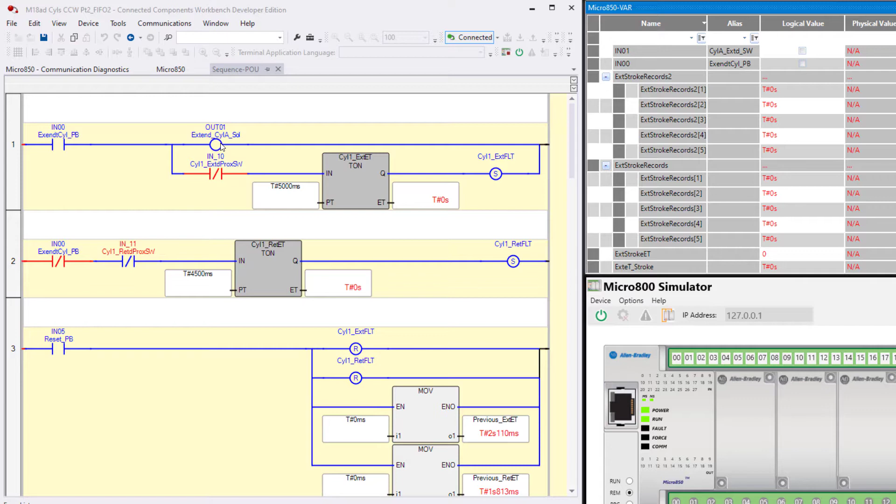Okay, we've pretty much worn out this particular lab project as is in the manual. But just to quickly go through what we have so far, if we push the extend cylinder push button, we energize a solenoid, and then we have logic that simulates the cylinder extending down here, this rung of logic. These two moves right here are moving 0 into these variables to clear them.

So if we click on input 5, you can see that rung goes true. It resets any faults and anything else we've got connected to input 5. Now remember that a little piece of code like this, if it were in an actual application, would have other hooks, other connections to other parts of the process. We don't have that here, so that's why we use inputs like IN05, reset push button, to do things that other parts of a real process would do to clear it to make ready for the next instance or incident.

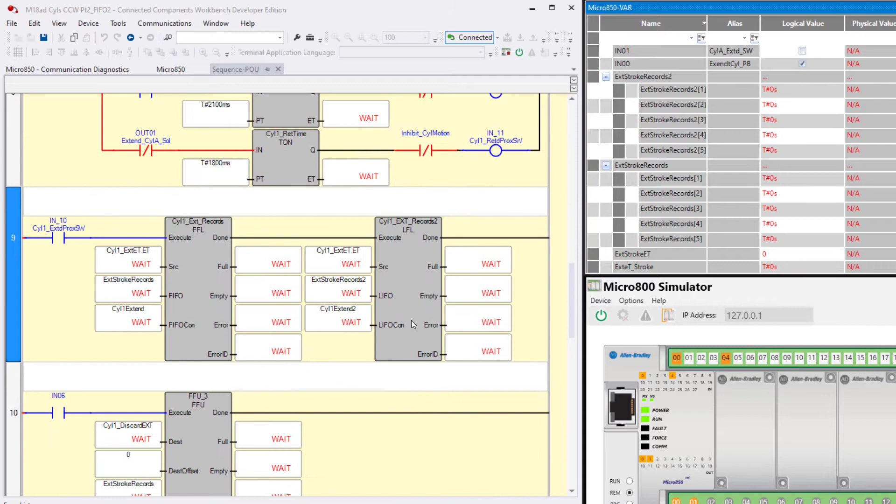And we also had our fault logic, and here if we have an extend or retract fault, we turn on output 0. We also created this rung of logic to simulate a sticky cylinder. In other words, if I turn on input 4, it's in neither position, not extended and not retracted. So if I turn on input 0 to make it extend, you see this is true while it's extending. And because I'm using this to inhibit cylinder motion, down here I'm going to make it time out and fault. Well, we don't want it to fault, so we'll turn off 4, turn off 0, let it retract.

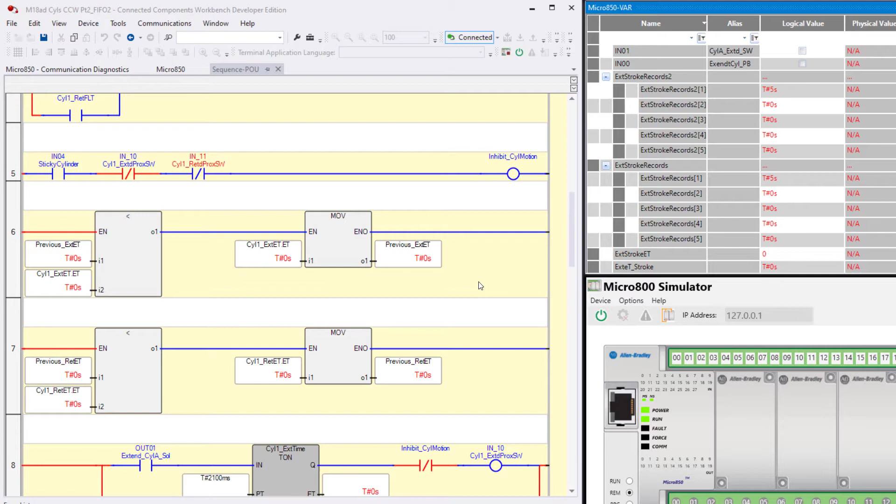Then we'll go back up here to where we have cylinder fault. See, we have an extend fault. And I'll turn on 5, and that resets it. And all we're doing here is demonstrating that if the current extend or retract value is greater, less is not a bad thing, but greater is. So if it's greater, then we want to move that into this variable. That way this variable always represents the longest interval for extend or retract.

Now let's jump down to the new stuff. In other words, this is the extras that I threw into this discussion. I'm using a FIFO and a LIFO. A FIFO, F-I-F-O, first in, first out. A LIFO is last in, first out.

If you wanted to compare these to an ammunition magazine, like for a pistol or a rifle, the first in, first out would not be possible with an ammunition magazine because the last one that you shove into the clip or the magazine is going to be the first one out. So the LIFO over here would behave like an ammunition magazine or clip.

So we have a FIFO and a LIFO, and they are both file instructions that work with files. Now in this case, we're going to keep it short. We're going to use a length of 5 for our file.

And the reason that we're doing that is because I'm not patient enough to sit here and operate this virtual cylinder 10 times or 100 times to get the stack full. And over here we have 2 stacks, extend stroke records 2 and extend stroke records.

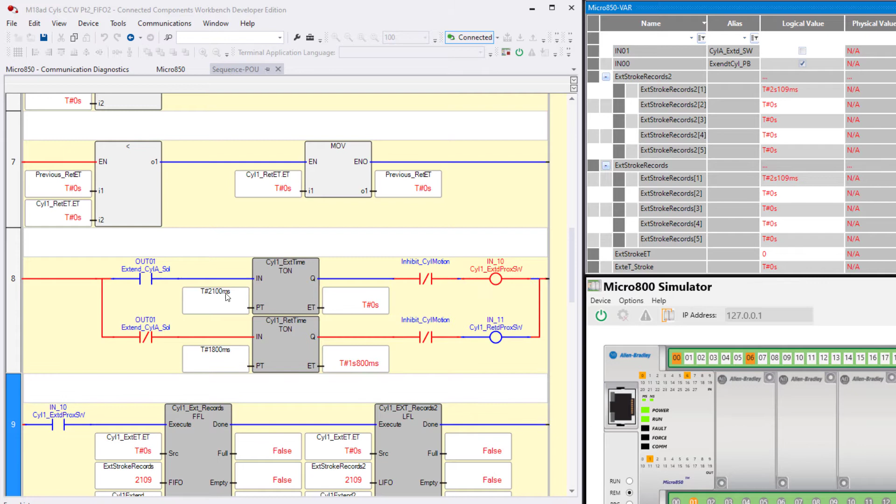To do that, we're going to turn on input 0 and I'm going to let the simulation time out, and you see that we have something like 2.1 seconds. Now if we go back up here, you'll see that I have 2100 milliseconds for my simulation of extension, and I have 1800 milliseconds to simulate the retraction. The simulation results in this virtual sensor, extended prox switch, retracted prox switch, going on and off based on some simulated interval for extending and retracting. And that's what we're recording here.

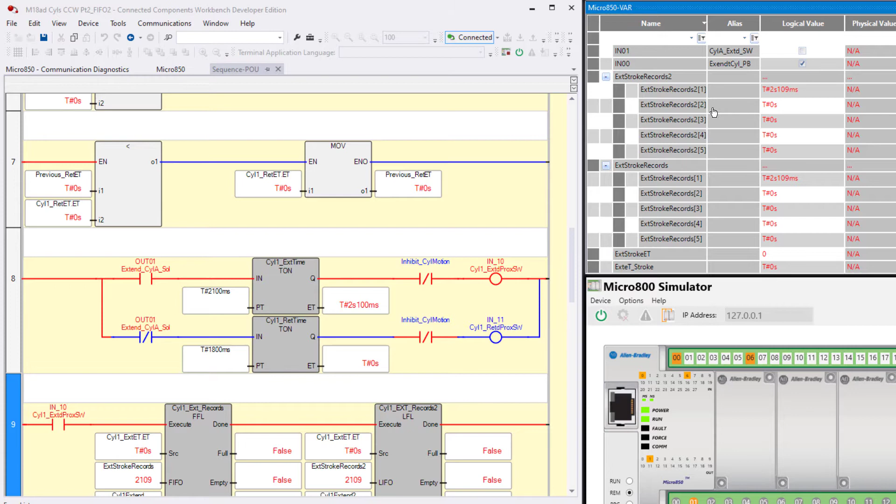Now I have this for retract as well down here. So down here are my retract records. This is the load and this is the unload, but I only have it for a FIFO. I didn't want to repeat the whole thing for both FIFO and LIFO because it works out the same. It's the same logic. It's just that you're recording the extend times here, and down below you're recording the retract times. Okay, so let's turn off the unload because we don't want to be continually unloading. I'll do that one more time to clear this out.

I also want to go down to this special type of FIFO, LIFO configuration or control. So this is kind of like the R6 control data types that you had in PLC5, SLC 500, MicroLogix. If you are RSLogix users or RSLogix Studio 5000, it had a type of data type called a control data type that was used for all the instructions of this type, and it had a length and a position. So here you see I have cylinder 1 extend length and position, cylinder 1 extend 2 length and position.

That's because you can't use the same instance for both the FIFO and the LIFO. See, cylinder 1 extend, cylinder 1 extend 2. In other words, the second one, you could have made it B or X, just so it's different. It has to be different. If you don't do that, what happens is it executes this one first, and it moves the position up once, and then when it executes this one, you end up with the values stored in every other position instead of every position. These are the things you learn the hard way. You need to use the same control data instance for both the load and the unload.

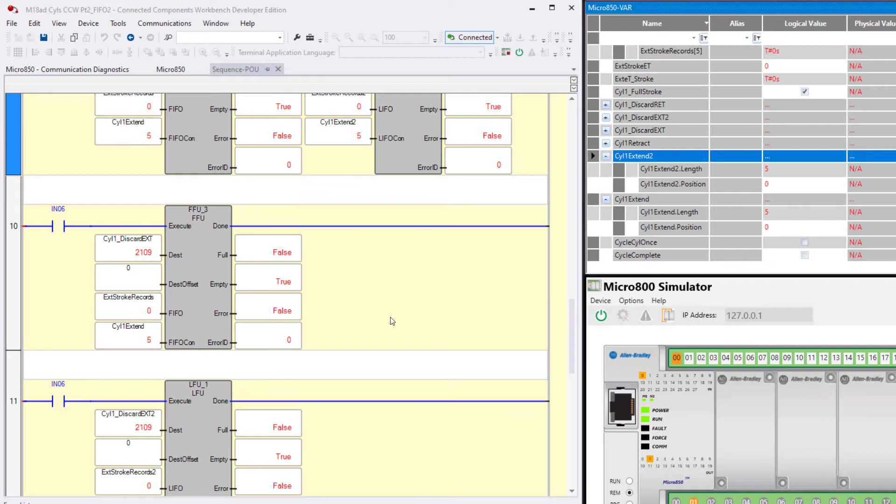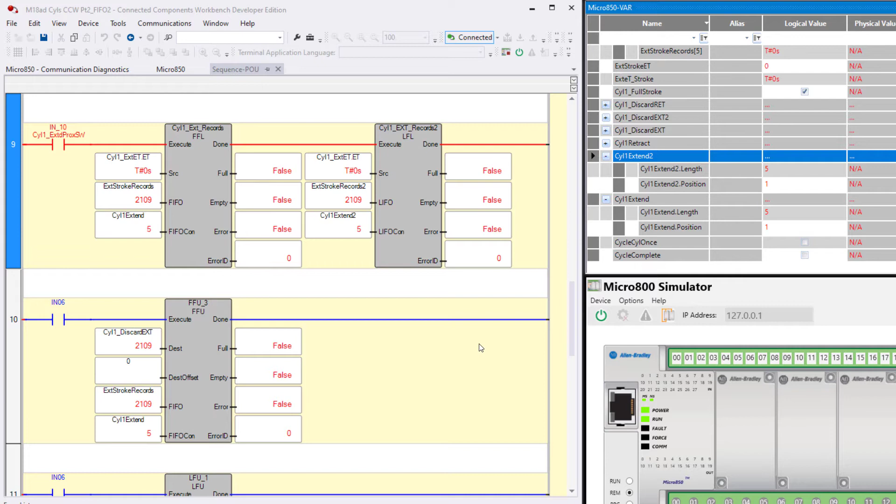That's why, and by the way, what you'll notice is 5 stays the same because that's the length. That's the control of the sequence of the false to true transitions and where it's loading and unloading. The length stays the same, but the position will change. So just to demonstrate that, I'll turn that off, let it retract, and then extend it again. See, the position goes to 1. Let it retract, and if I do this again, the position would go to 2.

So let's go back up to our data here. These are our 2 stacks of 5 time. Notice that this is a time data type, 2 seconds, 109 milliseconds, or you could say 2109 milliseconds. And you'll notice that here it displays it as seconds and milliseconds. Here it's displayed as milliseconds. Okay, in both of these, 2109 milliseconds. That's the first element, so to speak, of the stack.

As you're playing with this, you need to pay attention to what's false and what's true. It's not full and it's not empty because there's a value in there, right? If I unload this, now you see it's empty. Both of these are empty. All of these variables are useful in your application.

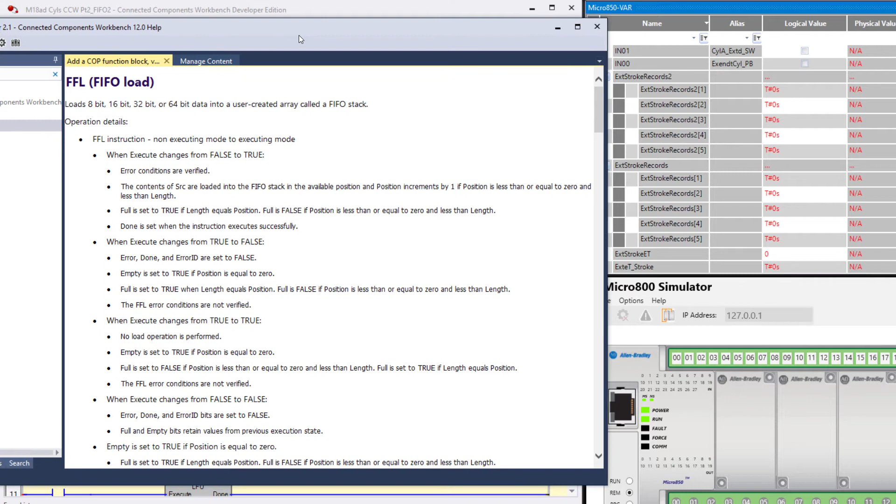Now, the only one that we're not going to explain a lot is some of the variations that you can do in these variables. And if you want to see more information about that, here's the help file for FIFO load. It says loads 8-bit, 16-bit, 32-bit, or 64-bit data into a user-created array called a FIFO stack. Now, I'm not going to go down and read all these conditions, but here are the variables. And you can see execute, source, FIFO, FIFO configuration, done, full, empty, error, and error ID. So error is, there is or isn't. The error ID is the actual way to identify what the error is.

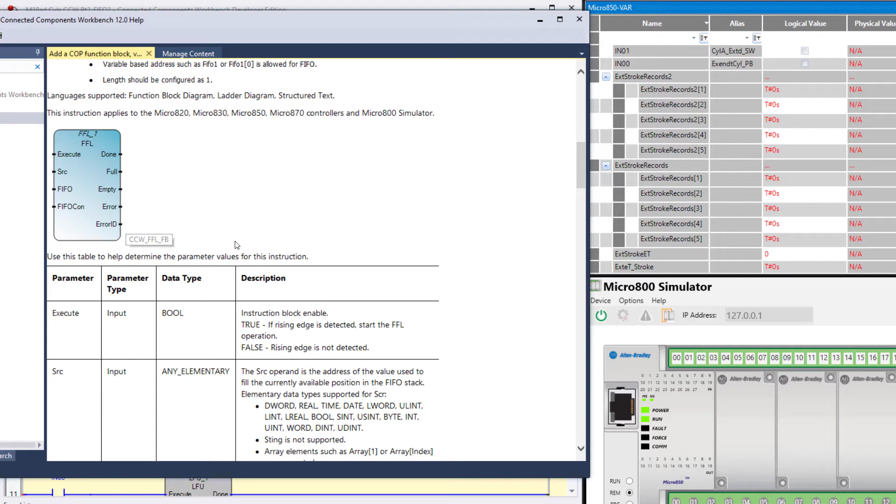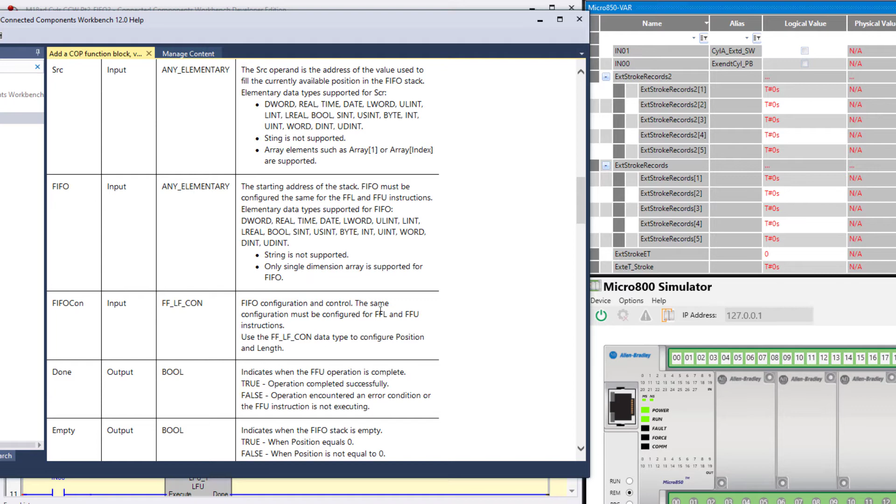And if you go to the help files, you can read the important stuff. One of the more important ones here is right here. The input can be any elementary data type. And notice it shows double word, real, time, that's the one we're doing, date, etc. String is not supported, so you cannot stack strings in a FIFO stack or a LIFO stack. And here it explains the configuration control. Notice it says the same configuration must be configured for the FFL and FFU instructions for the same stack. Okay, and there's no reason to read the rest of these.

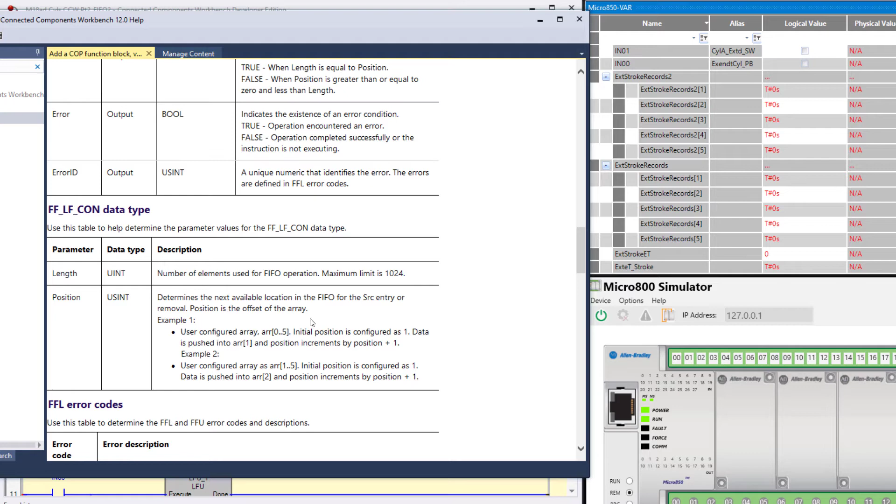Here is your configuration data type, number of elements used for the FIFO operation, maximum limit 1024. That's important to note. And then the position determines the next available location of FIFO for entry or removal, meaning load or unload. Okay, so let's pull this back out of the way here. We've got nothing in there right now, right? It's all unloaded. So let's do this, turn on 4 for a couple seconds and then back off. That way it inhibits the extension of the cylinder.

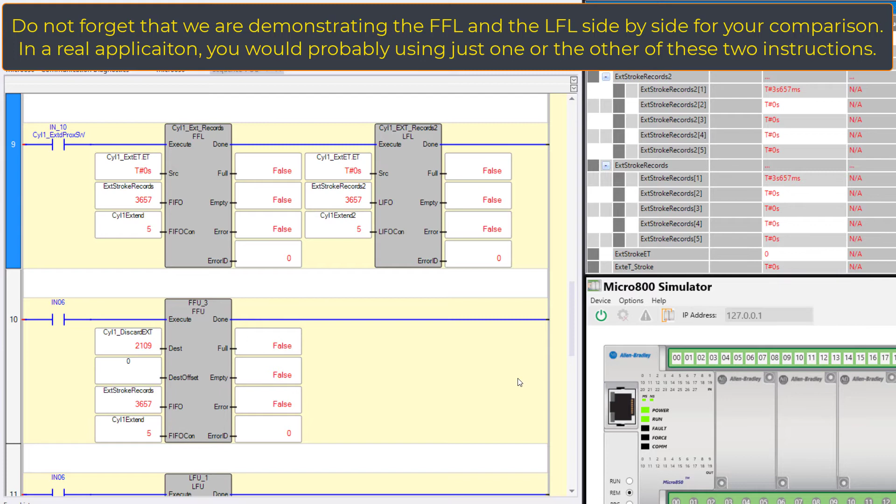Now as we turned on the sticky cylinder, you notice that both the FIFO on the bottom, extend stroke records, and the LIFO on the top, both loaded that extend value into element 1 of that 5-element array. Whether it's a FIFO or a LIFO, it's going to load it in the same position. Now let's do another one, and we'll let it time out to 2 seconds, 2.1 seconds.

Now let's do another one and hang it up maybe a little bit longer. If I go too long, well, I didn't go as long as the first time. See, that's 3 seconds, 4, 6, 8 instead of 6, 5, 7. So I'm just guessing when I do this kind of stuff. Maybe that one will be a little longer. Okay, 4 seconds. I wanted some different values in there, so we'll do one more.

Now we've got 4 in there, right? Notice that it's not full and it's not empty. They both say false. So let's do one more. Just let it time out for the standard value. When I say standard value, you know what I mean. I mean the down here or up here in our 2100 milliseconds.

Now the way we're capturing these values and stopping them is what's giving us that extra little 9 thousandths of a second. Notice it's 2109 instead of just flat 2100. We're not concerned about that. What we're concerned about here is the function of the FIFO and the LIFO. Okay, so notice that both of the stacks look 100% identical. Same values in all 5 positions.

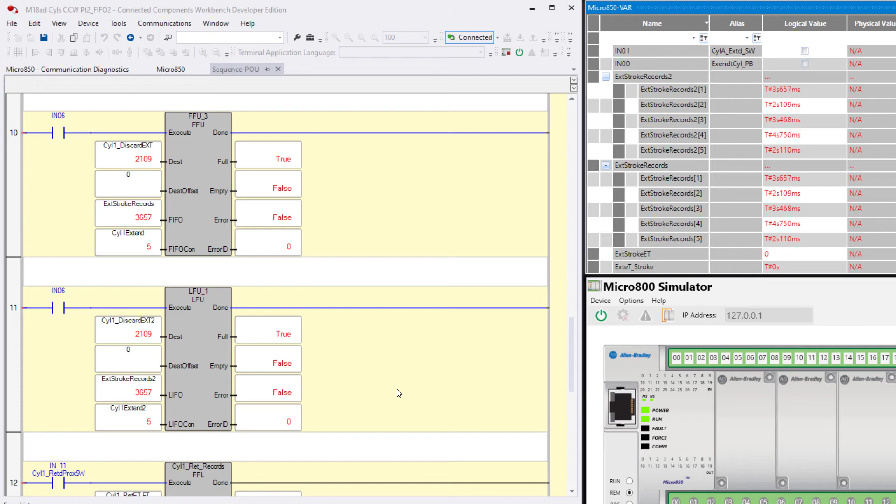So now what we're going to do is unload, and we're going to unload both of them simultaneously. We've got input 6. This is the way I've got this screen set up. I can only capture from up here down to about here. There's more down below that, as you can see. So I could scroll down and show you the unload for the LIFO, but we'll just leave it like this.

And I'm going to turn on 6 once. And I want you to notice where it unloads from. This one is 3657, that one's 3657. So unload once, and notice that the number 1 element for the FIFO unloaded the first one that was in, not the last one. This one unloaded the last one. So last in, first out.

Which one's it going to unload for record number 2? This one. This is the LIFO. The last one in was this one, right? 2.969. This was the last one in. This is a FIFO. So let's do one unload.

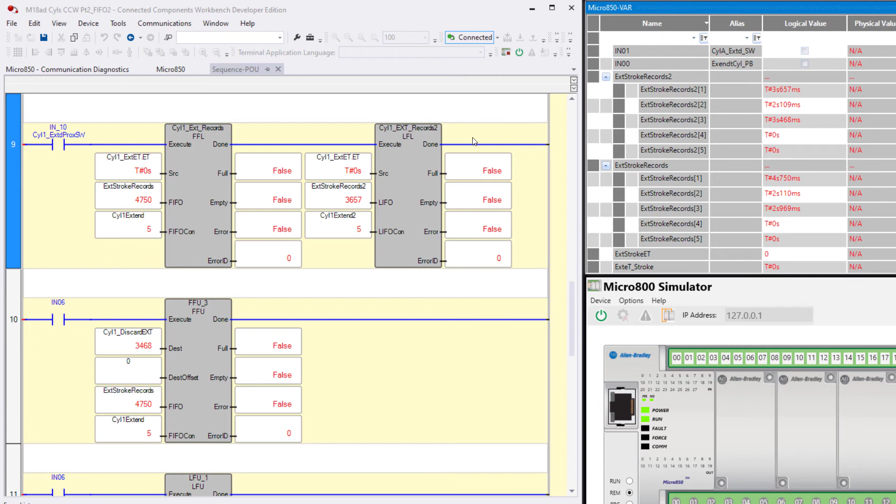I guess the other thing I could have done is had a different trigger for unload for both of them. And you know what? I think I'm going to do that. I'm going to pause, change that, and come back. Okay, here we are back again. Notice now I have input 6 over here in the logic unloading the LIFO, and I have input 7 unloading the FIFO. So unfortunately, I went offline, changed things around, and downloaded; I could have done this online and I wouldn't have lost my values here.

So let's put some values back in there. We'll let the first one be the 2.1 seconds, more or less. Then we'll make the second one something longer. Okay, I have the same two values in there. Now I can unload anytime I want, but I like to have it full. So let's put some more values in there, get something longer. Okay, 2, 3, 4. If I go to 5 seconds, it'll fault. I will do something a little shorter, 2.3.

And 2.9. I'm going to unload over here the FIFO first, okay, because that's the first one we did. Now, watch the values on each end of the stack, 2.9, 2.1. So I'm going to unload the FIFO by turning on 7.

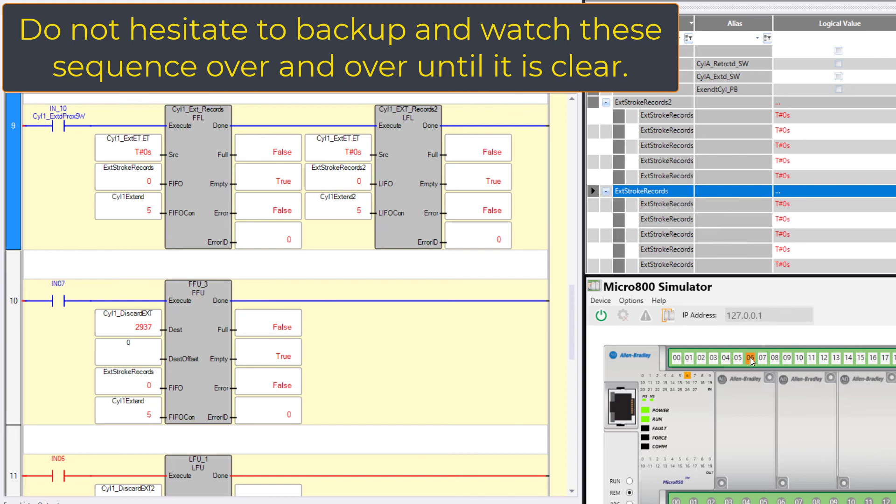So if that's true, then 2.4 should disappear when we do this one. Now 4.2 should disappear. I know this is hard to keep track of. It might even seem confusing because it's hard to watch these stacks. That's why you have to have different values in there. Otherwise, you'd have no idea what's going on when you're watching it. Okay, so FIFO and LIFO, load and unload.

I also use something down here. I'll just throw this in. I wanted to count strokes. In other words, I wanted to count each stroke of cylinder 1. And I mean full stroke, which means I don't want to make a count unless it fully extends and fully retracts. I don't want short strokes, half strokes.

The conditions that I'm using are... and I want you to watch this. I'm going to turn on input 0, and then after 2 seconds or so, it's going to hit the extend prox switch and turn on this bit. This bit is going to seal itself in until this goes false. Now this is going to go true as soon as we move off of the retracted switch. So there'll be a time when neither input 10 or input 11 are on because the piston is between the ends of stroke, okay?

So I'm going to turn on output 1. Well, I'm going to turn on input 0, which is going to cause it to extend. So this comes on, and then after 2 seconds, that comes on, and this is a pulse rising. So that's why it's black now, because it's no longer true. It was true for one scan when the system first saw that the extended prox switch was on. So it turned on this bit, which sealed itself in until, now watch, we're going to retract.

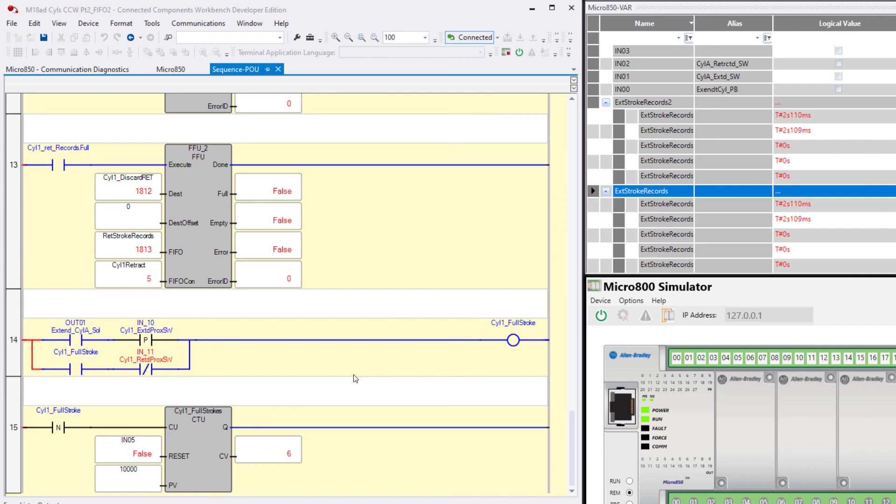In other words, I'm counting when the full stroke bit goes off, because that can only happen if you completed a full extension and retraction. Watch again. Turn on input 0, it's extending, it extended, it's retracting, retracting, full stroke goes off, and we count up 1. So these aren't instructions that you haven't used before. You know, true off, pulse rising, pulse falling, and count up. So just another little piece of code thrown in for those of you that are watching the videos.